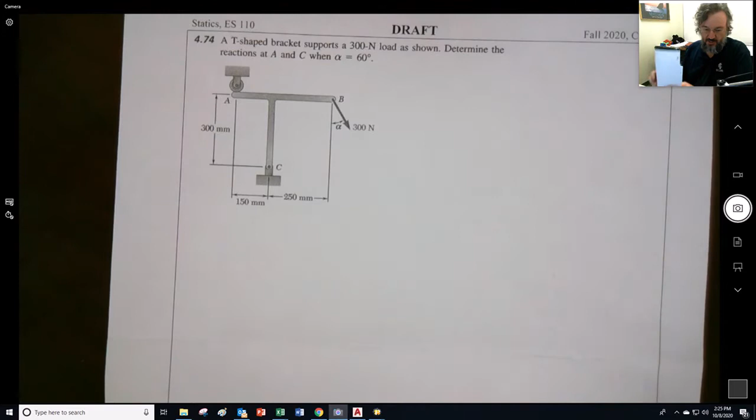Another example problem. I don't know if you'll actually need this, but maybe it'd be helpful to somebody. I don't know, we'll see.

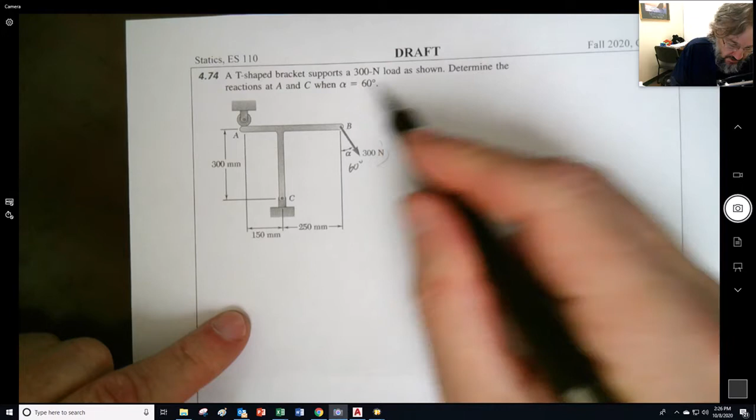Okay, so I think this is another three-force member problem. We have this T-shaped bracket that supports a 300 Newton load. This is 60 degrees right here. We want to determine the reactions at A and C.

You can see that this is a roller joint, so it's only going to have a reaction in the vertical direction. This is a pin joint, so it would be vertical and horizontal. So we start off with our FBD, declare X and Y, and make a nice drawing of everything.

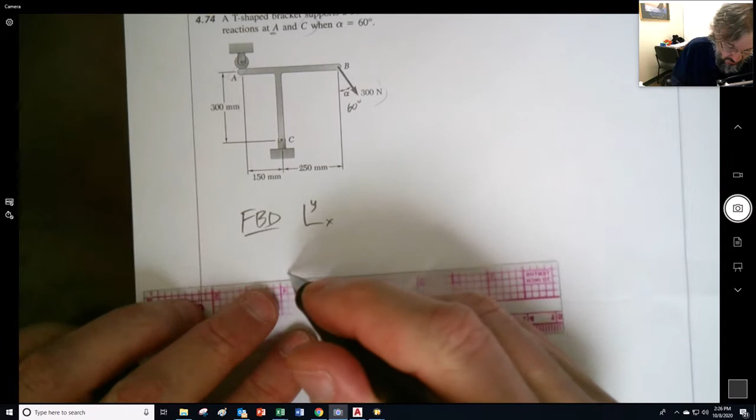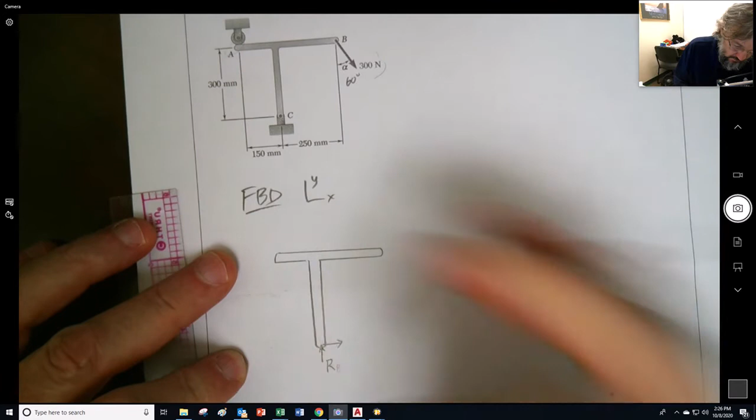And we'll put the reactions right here. This is going to be our RC, RCY, RCX. We're going to have a reaction right here, this is going to be our RA, maybe RAY, but there's no RAX, so we'll just leave it in there.

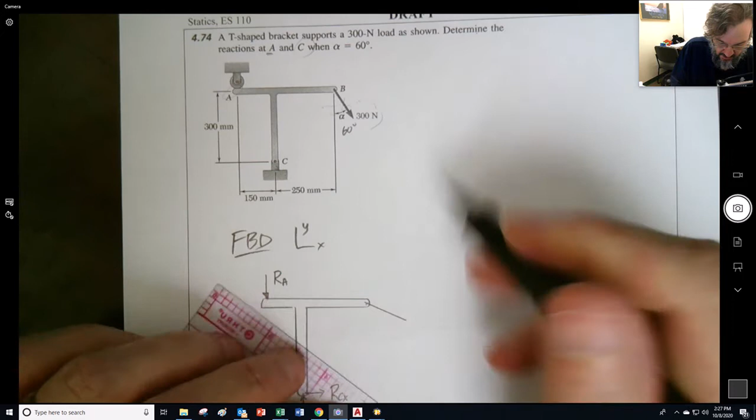This is drawn like, that looks like more like 30 degrees, so I think maybe we could help ourselves out by trying to make it look a little bit more accurate. That right there is 60 degrees, right? And this is 300 newtons.

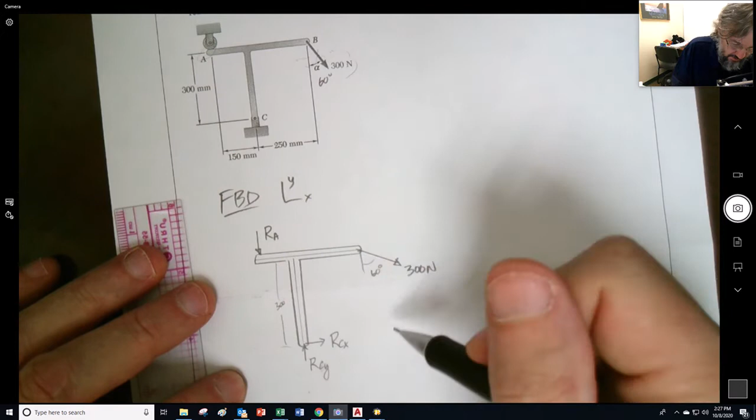And we get some dimensions on there. Let's say we did it in millimeters. So there's 300 millimeters right there and there. This distance, I'm going a long leader on 150, and in this distance we get 250.

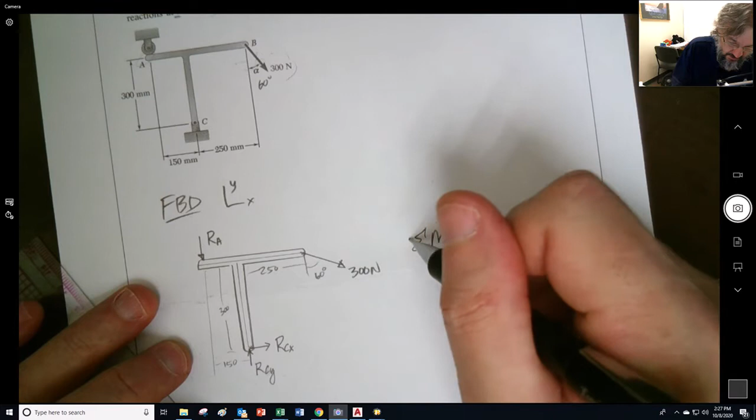All right, so the sum of the moments, let's take it about C first. It's equal to 0. Take a look at this, and RA is going to go counterclockwise about C with a moment arm of 150. So RA times 0.15,

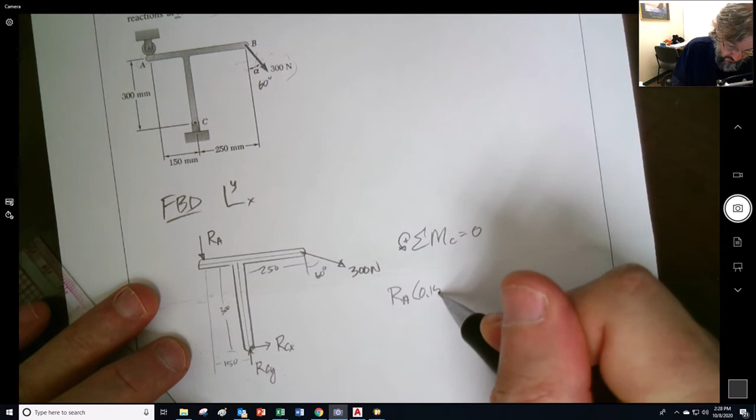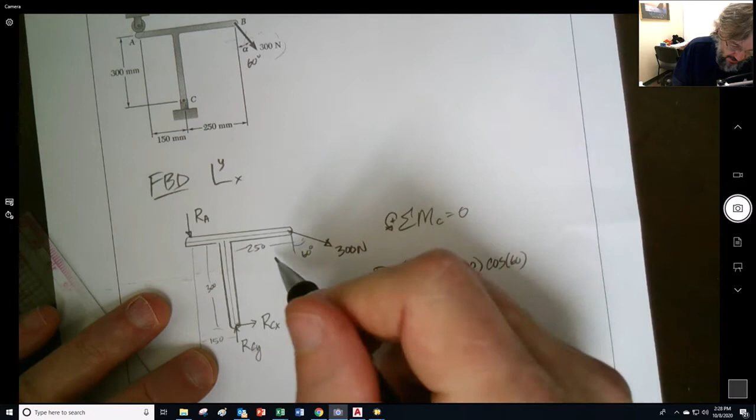and okay, so this guy, he's going to have a downwards component, and that downwards component would be clockwise, so 300, and that's going to be, the downwards component is cosine of that, cosine of 60, and that's going to have that moment arm of 0.250, right? I have to go down to the next line because I started out over here.

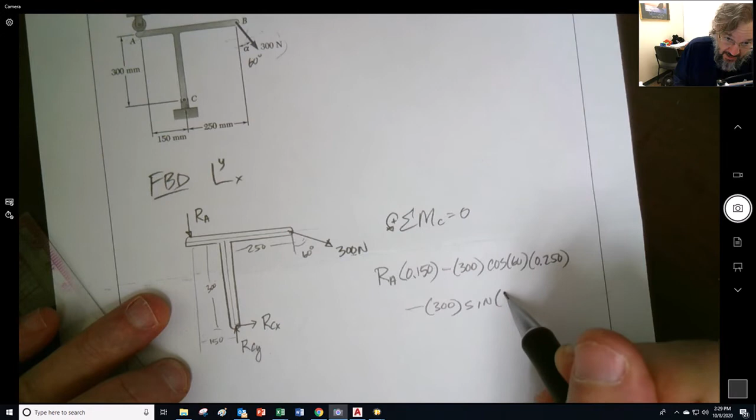And now we have the horizontal component of 300, and that too is going to go clockwise, so minus 300, but now it's going to be the sine of 60, which is opposite from the angle right there, and its moment arm is going to be 300.

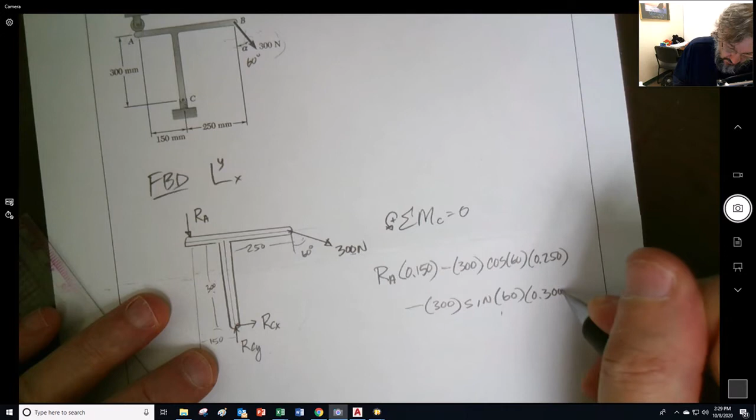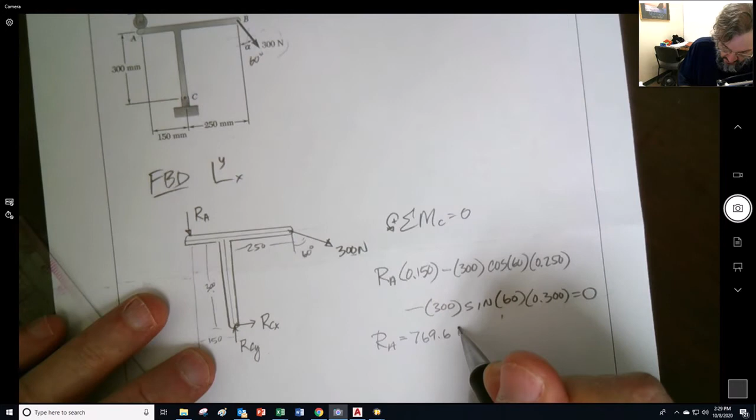And if I do that, let's see, double check. Yes, I get 769.6 newtons, and that's downwards. So that's one of my answers right here.

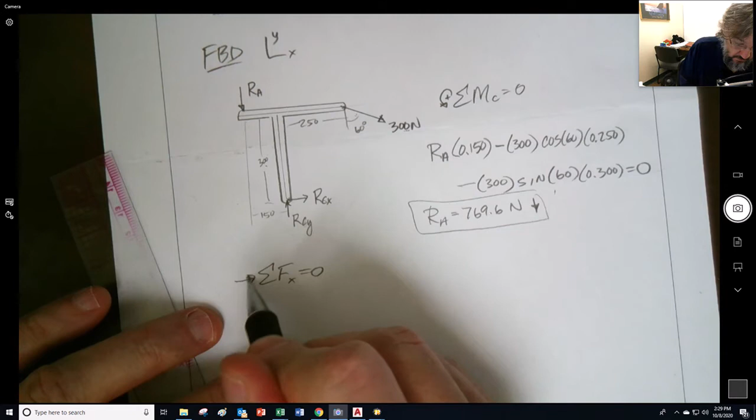Now I need it at C, so we take the sum of the forces in the x direction equals 0. And that's going to be RCX, I have it pointing to the right. We could observe it's going to be to the left, but we have it drawn that way. It's going to be plus our 300 times our sine of 60. RCX is negative 259.

I don't want to put an arrow in there yet because I have a negative, but we know it's that way right there. Okay, and then sum of the forces in the y direction, upwards is positive. Take our RCY, subtract out our RA, which we just got 769.6, and also now the minus 300 times the cosine of 60. And then RCY ends up being 919.6 newtons.

And so if we have the RC is the square root, we might be asked that, right? Of 259.8 squared plus 919.6 squared. We get 955.6 newtons.

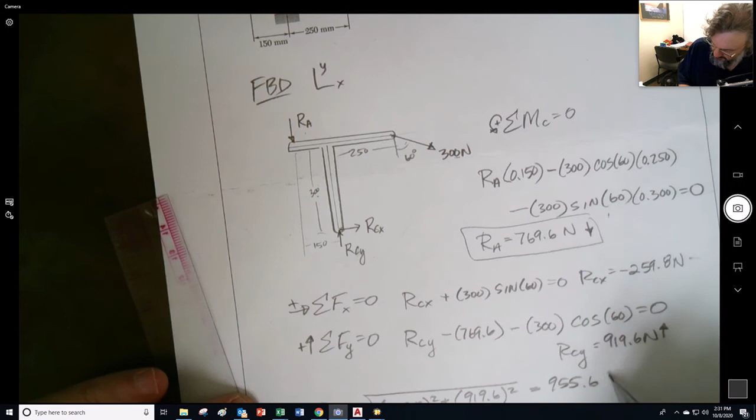And the reaction angle onto the thing would be the inverse tangent of the rise over the run. So the 919.6 divided by 259.8, and I don't advise you to use the negatives inside there, it's just think your way through it instead. You get 74.22 degrees, right? So the reaction at C is

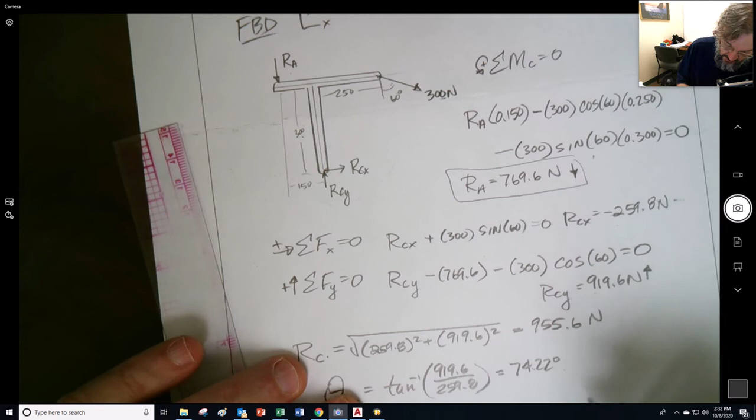955.6 newtons, and we notice that this one is going to the left and this one's going up, so we're going to have, that's going to be the direction of the angle, 74.22.

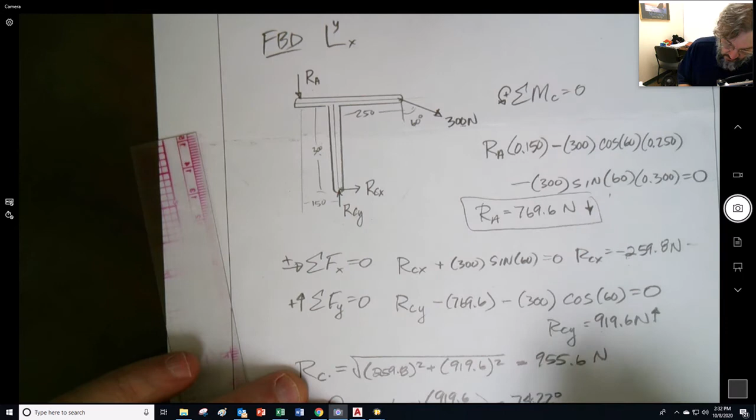And now let's take a look, just like we did on the other one. Let's graph this one. Ooh, let's focus a little bit more. Document camera a little bit higher. That's nice, that's a good document camera. I like that document camera. Okay, so I think I'm okay.

Let's take and draw this thing out, this little T. Make it kind of proportional, doesn't have to be right, doesn't have to be perfect. It's my little Bob Ross voice.

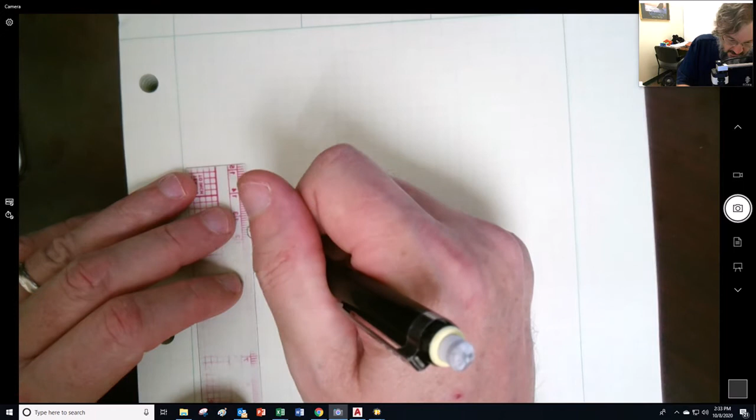There we go. And this one was down, and this one was at 60 degrees. So that's going to be something like that right there, right? Because that right there was 60 degrees.

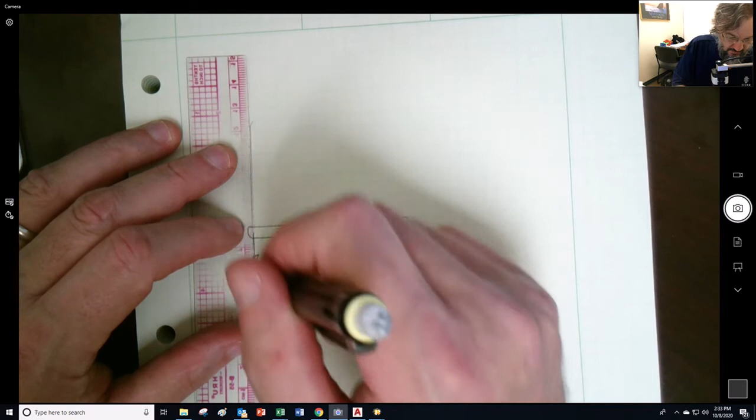So if we extend these lines out, we can expect this guy down here to intersect at that concurrent point right up here, right? So what I did, here's mine - I actually drew it a little bit smaller, and I was able to get all the way over there. And then, okay, I didn't actually need to do that.

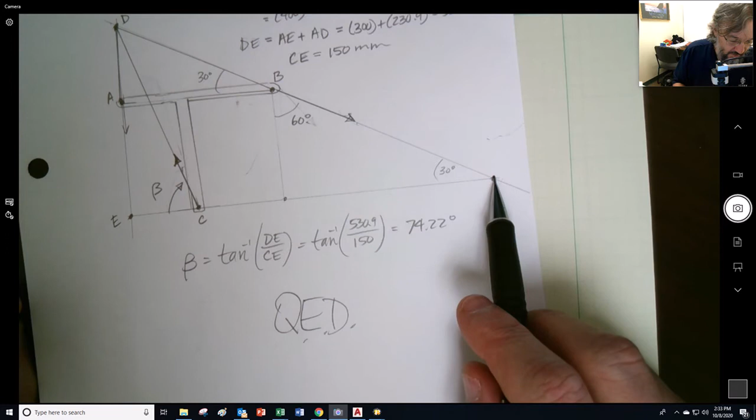Okay, I think I'm good. So I'll do this in a different way here. Let's see, this dimension on here was 250 to get to right there. And then...

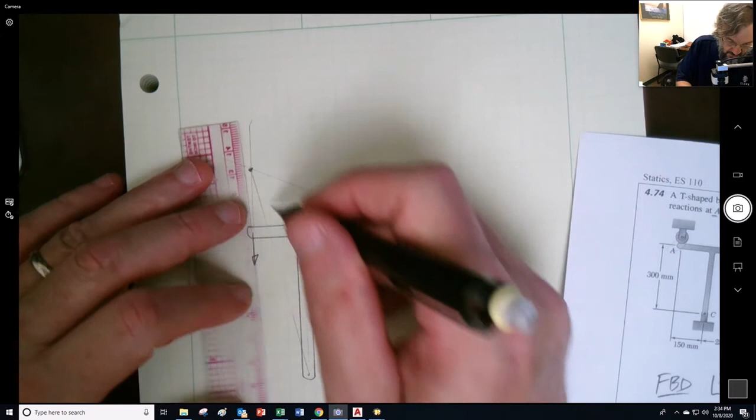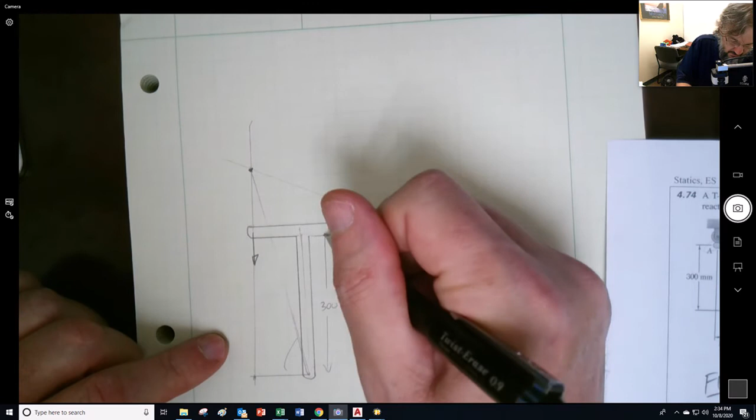I don't know if I need that - no, I do, okay yeah. So what I really want to do is get to this right here and this right there, right? And if I can get those, I can figure out that angle. If I have that dimension, which I already possess as 150, and I have this dimension right here, which is 300, up to there - to the center of that. So what I really need to do is find out what this dimension is and add it to my 300, right?

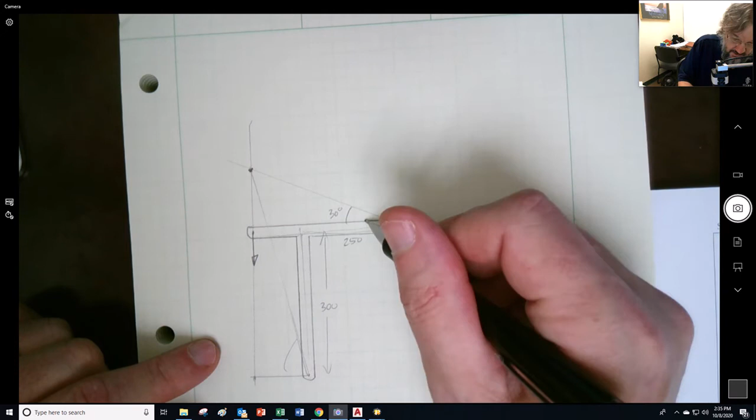And I know that this is 30 degrees right here, because this was 60, so this must have been 30, so that must be 30. And by the way, this dimension, 150, right - what we got from that right there.

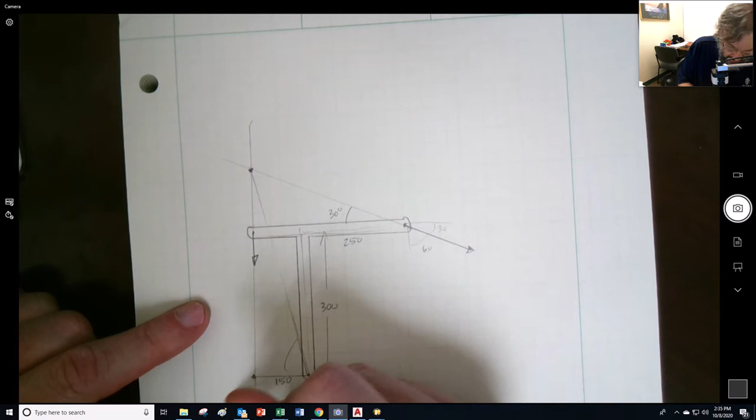So let's see, what I want to do - I'll take a little cheater look over here - is I can say, I decided to call this E, call that D, because I think everybody else is taken. Because that was C, and this was A, and this was B. Yeah okay, so that's E, and that's D.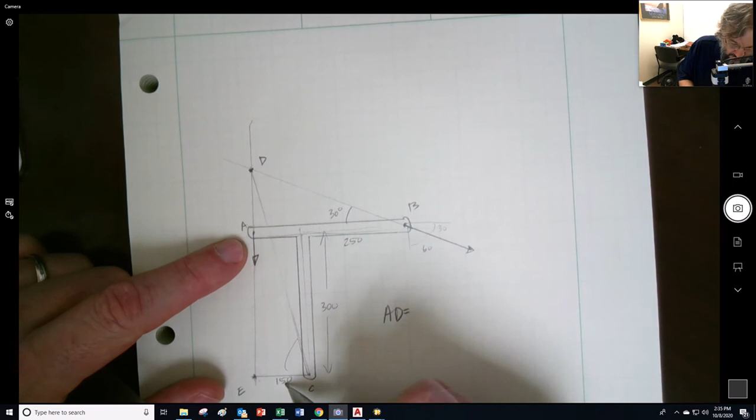So let's see, I take AD - okay yep, AD is just going to be equal to my 150 plus 250, which is 400. 400 times the tangent, because this is the run, so I can multiply by tangent and I get the rise. Tangent of 30.

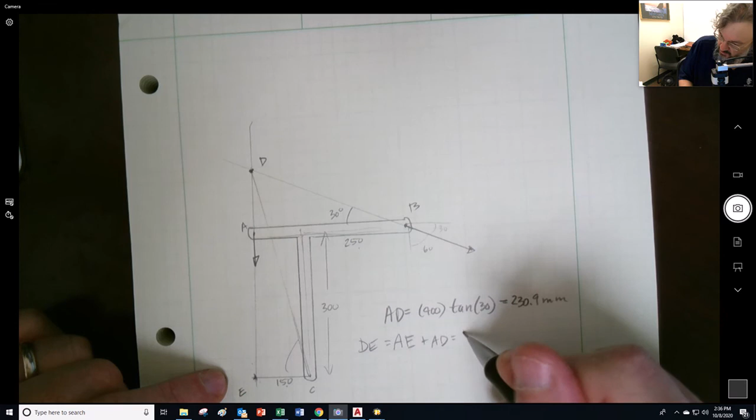And I end up with 230.9 millimeters. And then I can take my DE - it's this distance right here - is going to be my AE plus my AD, so that's 300 plus my 230.9, I can do that - 530.9 millimeters. And then I already know that my CE was equal to 150.

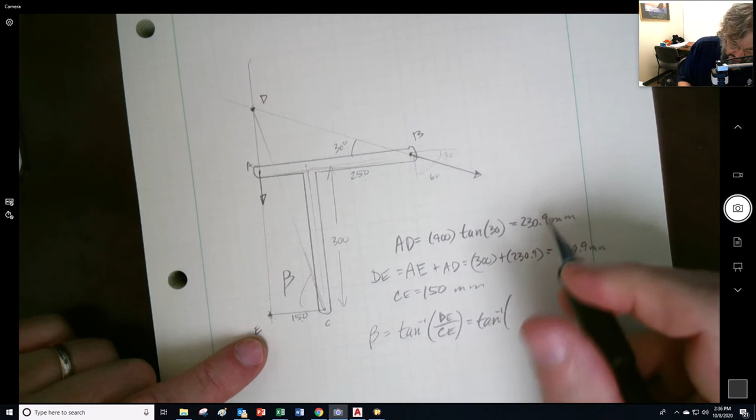So I'll call this one beta. I like beta. And take the inverse tangent of my rise over run, which is going to be my DE over my CE. My inverse tangent of 530 over 150, and I get 74.22 degrees, which, boom, matches this right here.

So I have demonstrated. Ta-da! Woohoo! Yay! Great hair day.

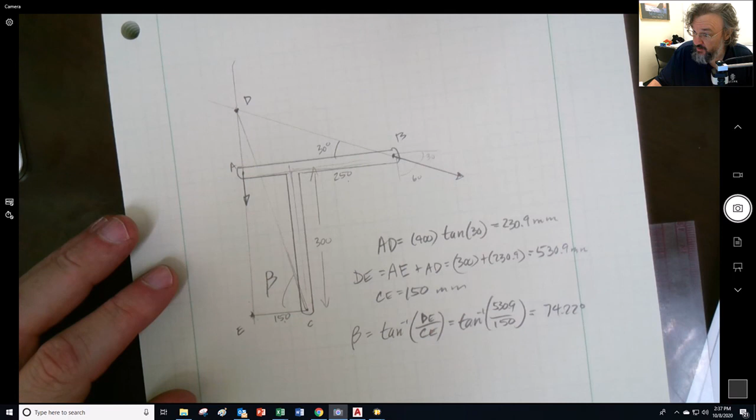So we have an 11-minute video. Not bad, I like 10.